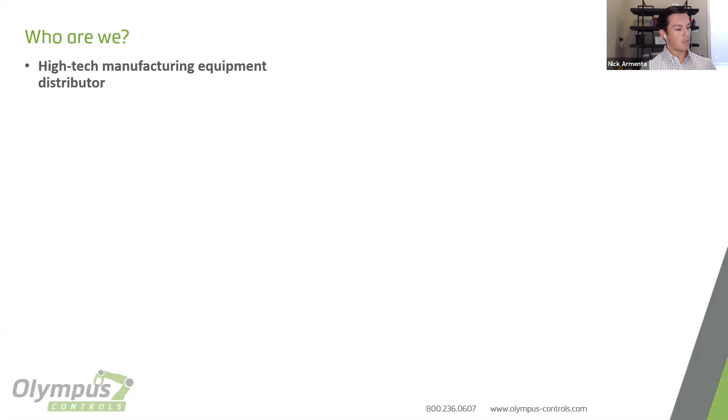Thank you so much, Kent. Thank you, Business Pros, for hosting me on this webinar. As Kent mentioned, I'm local to the area. Some of these are my clients, so I'm very familiar with the DFW locale and the technology in general. So I'm with Olympus Controls. Just a quick intro, who is Olympus Controls? We're a high-tech manufacturing distributor. But what that actually means is that we provide automation solutions, so we're putting all the parts together. We want to be the first ones you call when you have a problem.

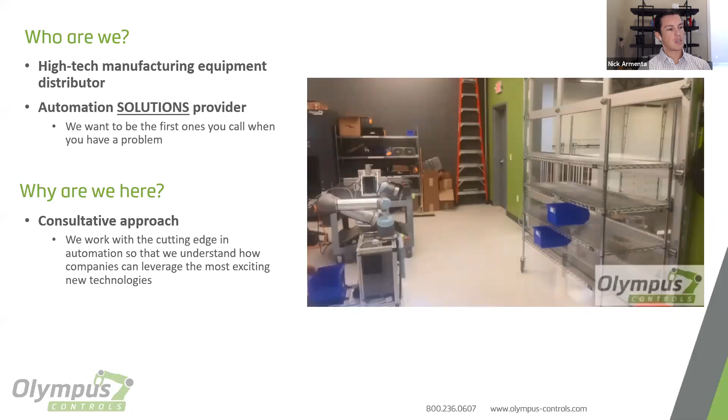Here's a good example of something we've done. You see a robot arm on top of a mobile platform using vision systems, electromechanical grippers, HMIs - pretty much the whole shebang when it comes to automation. So why am I here? We also take a very consultative approach. We work with some of the more cutting edge technologies, which means they're inherently not as well known and not as well understood.

So our goal is to educate everybody so that they understand where these technologies fit and how they can help them excel and achieve what they haven't been able to achieve before in production and manufacturing.

So the topic today that I'm covering is robots. Whether these are called 6 degrees of freedom arms, 6DoF, or 6-axis articulated arms, they all basically mean the same thing. It's a machine that can duplicate anything your human arm does. We can reach any point in space from any location.

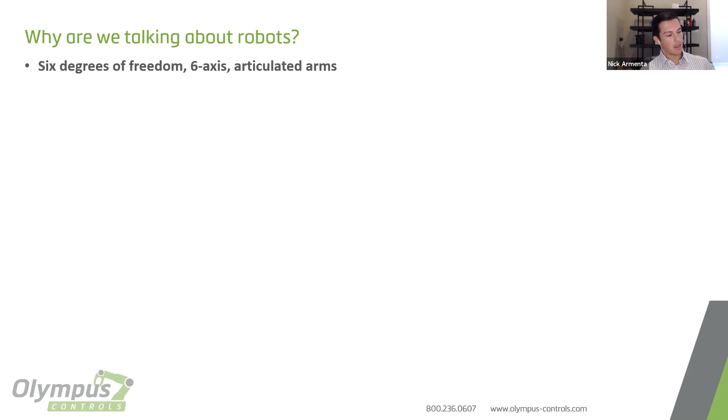So why is that important? That's because of the implications. Eventually, they will be able to do everything you can, but faster, stronger, with more precision, and for pretty much infinite durations. So that's extremely exciting. It's pretty much the closest we've got to an everything machine since we've started.

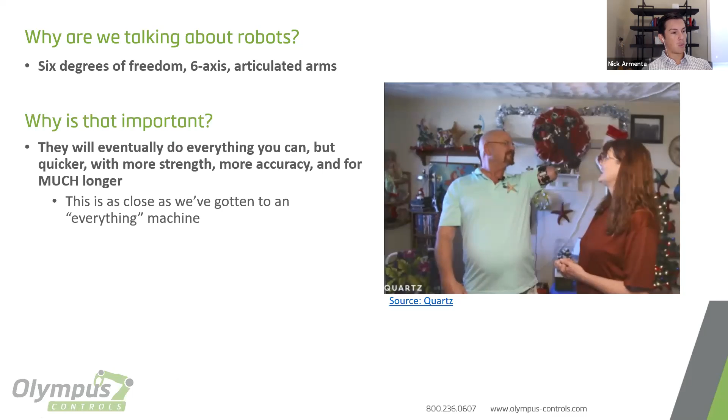So you'll see here, it's more of a humanoid type of arm, but at the same time it has all of the mechanisms we'll be talking about today. It's really as close as we've gotten to being able to do everything with one type of device. But of course that wasn't always the case. These robots have evolved from very simple mechanisms, as you see here, to the more advanced, which I'll show you right now. So let's go with a brief history.

So the first agreed upon robotic arm was the Unimate, developed for GM for welding. This was for spot welding. It did the same thing at the same spot over and over and over.

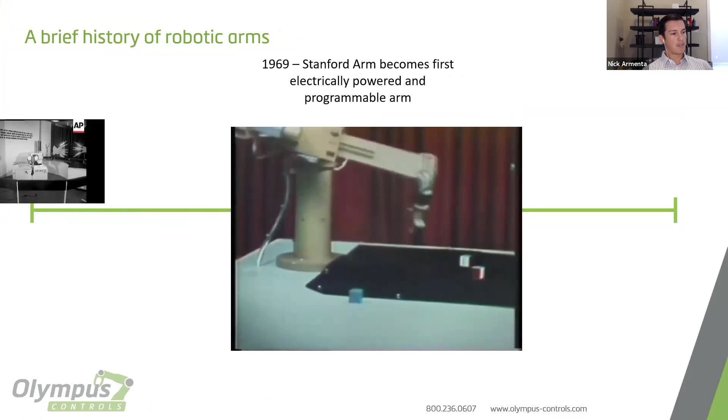From here, we got to the Stanford arm, which is the first electrically powered and programmable arm. So from here, we've advanced to something that can be changed and is controlled completely with electricity, which gives a lot more capabilities. Then the next step is 1963, the first 6 degrees of freedom.

So this is what I mentioned earlier, something that can manipulate things the same way your human arm would. We move on to the Silver Arm in 1974.

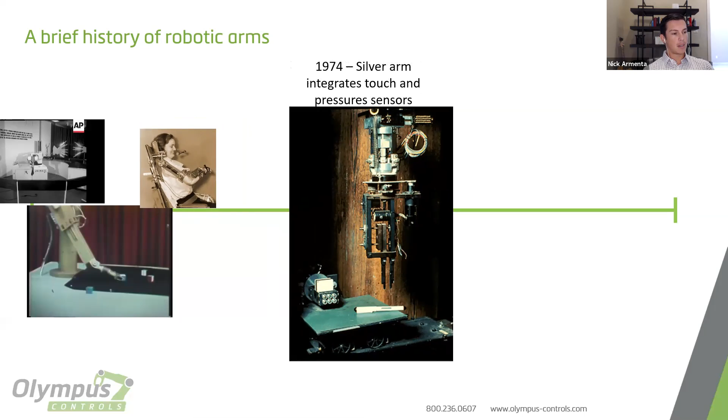This was a device that integrated pressure and touch sensors. So instead of being hard programmed, it is now able to sense its environment to make decisions on the fly and be more accurate and more flexible.

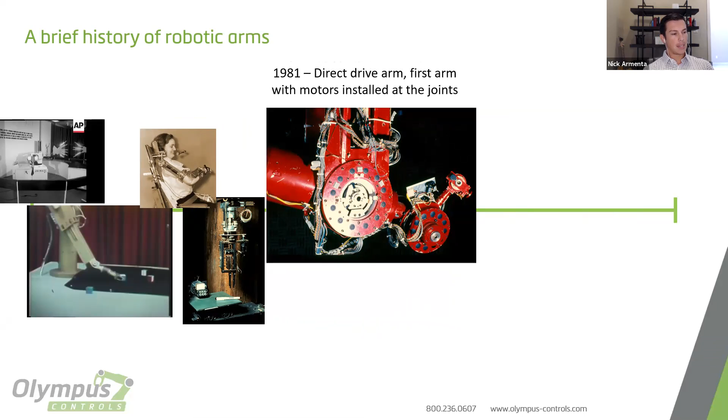In 1981, we started putting the motors at the joints of the arms so that each joint could be controlled independently, not an overall cam type system. What this allowed was for even more complex motion and even lighter weight, stronger arms.

In this next video, you'll see we sent robots to space in 1997. So now we're putting robots in very harsh environments with very complex applications.

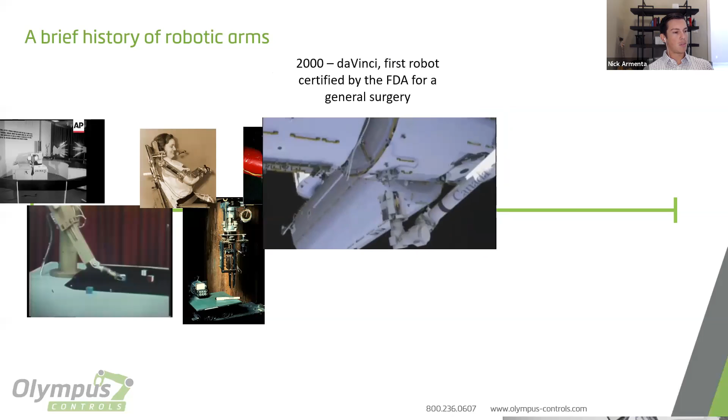Next, we have the Da Vinci. This is very exciting because this is the first robot that was actually able to be approved by the government for working not only around, but inside of people. That's a pretty big step for us trusting robotics, so a pretty exciting step as well.

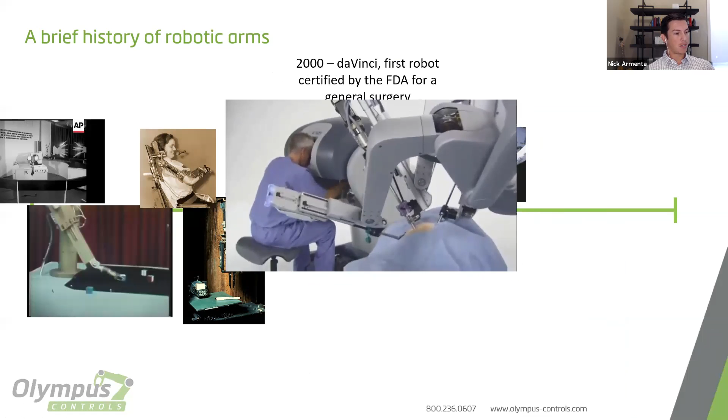Next, in 2007, Universal Robots created the first robot capable of working alongside humans. So now you can safely install robots. You can see me in this video controlling it by hand, something you really weren't able to do before the mid-2000s.

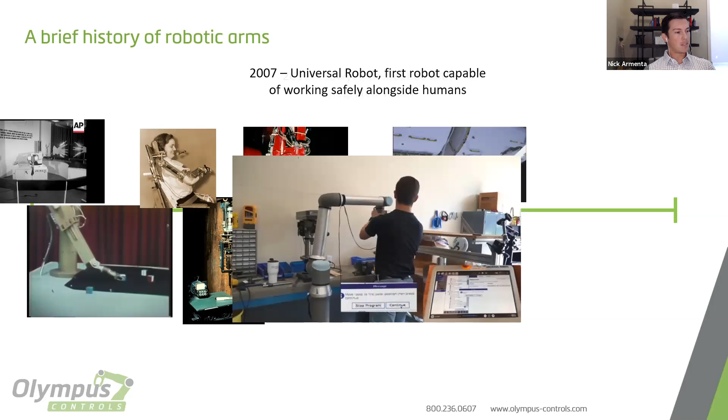In 2012, a company called Rethink Robotics created the Baxter robot, where they integrated cameras into the end of every robot. So not only can it touch, but it can also see everything it's doing, which is a critically important step if you need to make on-the-fly decisions.

And then in 2018, Universal Robots started integrating those touch sensors into every single one of the robots. So every robot that goes out has a sense of touch from the E-series. It can understand if it's encountering forces or if it's being impeded by objects for even more safety.

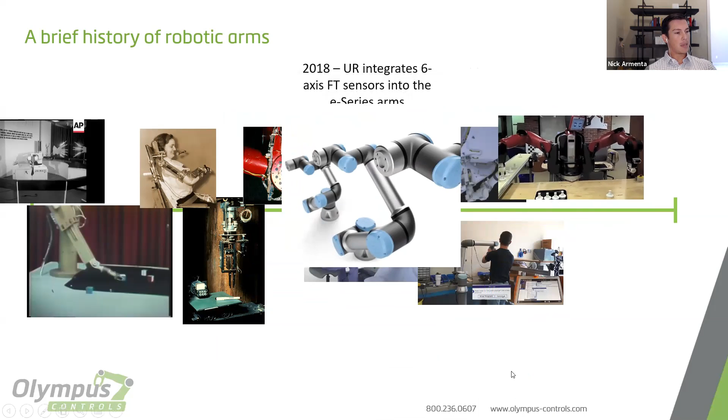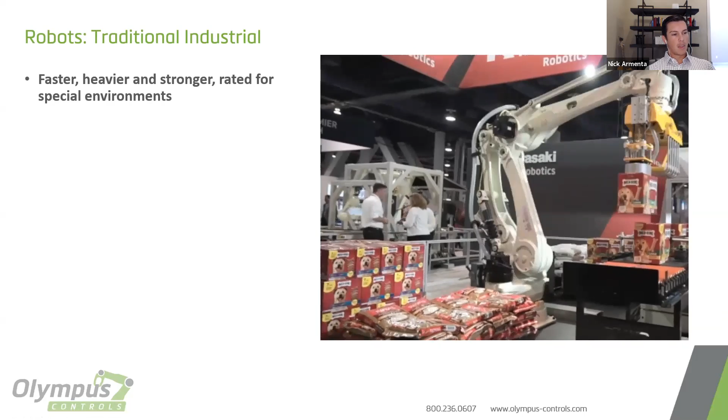So the two different flavors of robots we have typically today, we separate into traditional industrial and collaborative. Traditional industrial is what you'll see here on the right. These are large arms, almost like a T-Rex or dinosaur. They're going to be very fast, very heavy, very efficient, very strong, very accurate, and made for very specialized environments like welding.

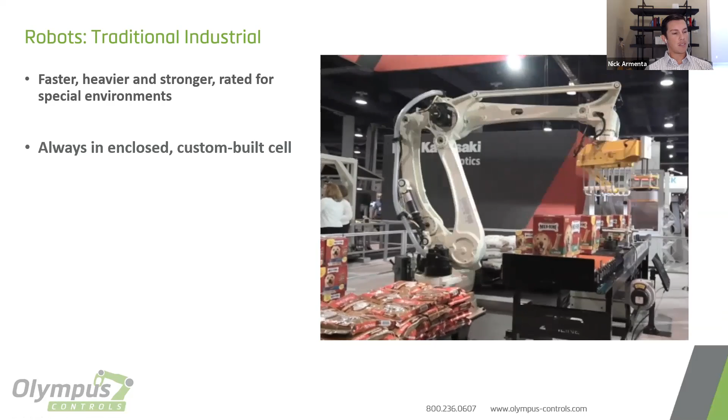What that also means, though, is that you have to put them in these enclosures or custom-built cells. You'll see the fence in the back there. There's quite a bit of space involved when you're deploying these robots. So it's not something anyone can just do on their manufacturing floor. They also come with a very steep learning curve, so anyone that programmed a robot about 20 years ago can probably still program them today when it comes to these types of robots.

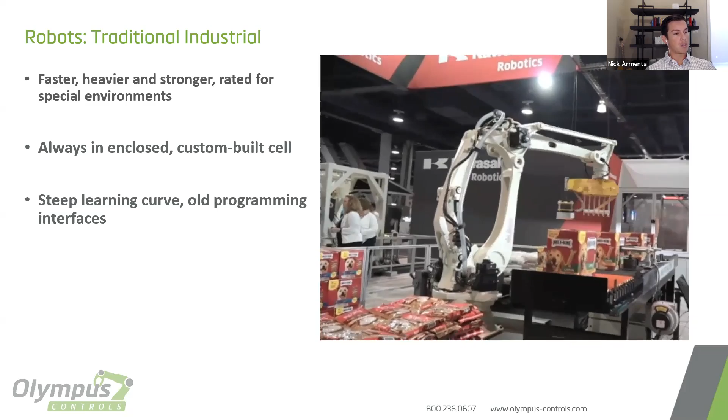The programming styles are tried and true, but they're not necessarily intuitive for the new users of today. They're primarily used in automotive, very high volume or high production lines, whether it's palletizing, picking, machine tending, welding, or adhesives—all the different types are where you'll find these robots.

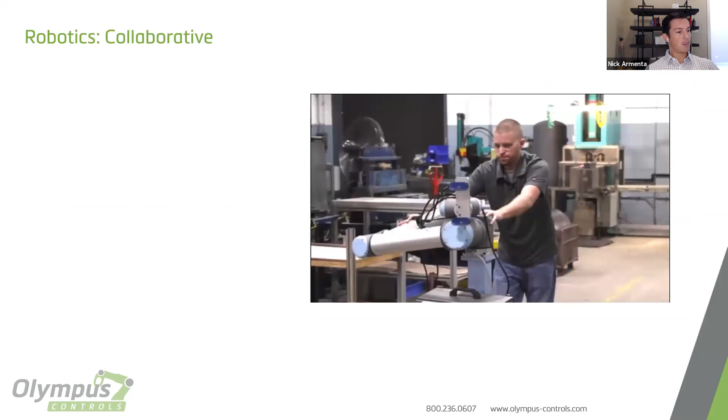The next flavor is a collaborative robot. These are a little bit different because they are able to be deployed alongside people. You'll see they have lower payload capacities, so we're only dealing with less than 30 pounds typically, but we also have slower speeds and a shorter reach. So those all sound like bad things.

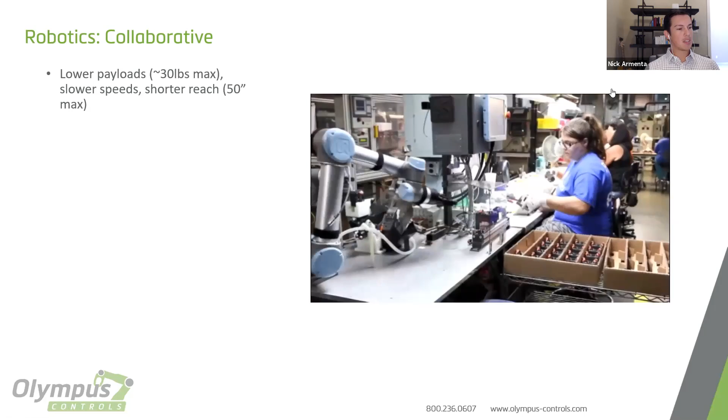And I thought the same thing when I first found this technology. But in reality, they're actually able to be a lot more flexible. That same slowness allows them to work alongside people. The ability to move them around makes them very easy to redeploy. In this video, you'll see them wheeling around the facility, and I know for a fact that Gary moves his robots around as well. So excited to talk about that.

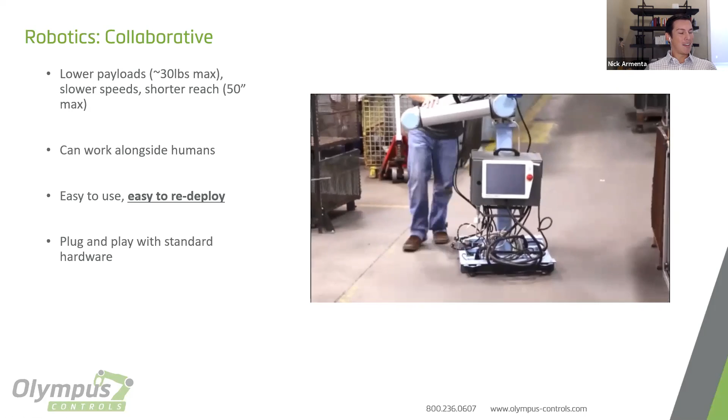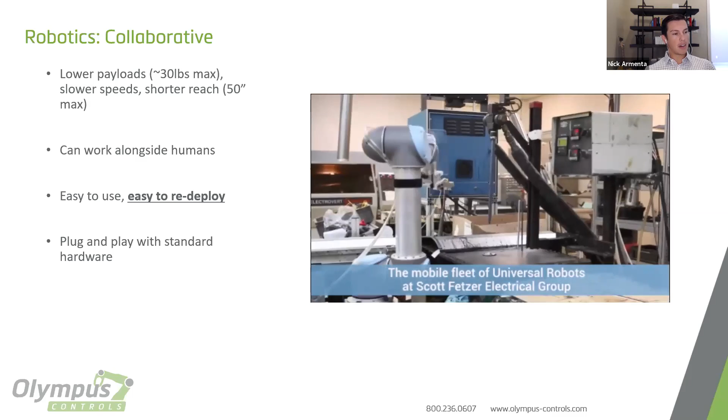Then they're very plug and play with standardized hardware options. So now instead of having to look for a dispensing solution, a gripping solution, welding, palletizing, they have off-the-shelf products that you can be very confident will integrate seamlessly with your production. So you don't have to reinvent the wheel each time.

But for all robots, the same is true. These robots are at their core a tool for enabling you to have more competitive advantages in your production. They're going to allow you to have a better use of human capital, having people use their minds, the most valuable asset, instead of their hands. Picking up and putting down things is not a very mentally strenuous effort.

They'll allow for higher throughput, so they're capable of 24/7 operation, which means they can work all the time without any kind of person monitoring them—overnight shifts, 3 shifts, 2 shifts. They have higher quality, so once they're programmed, they do this exact same job each time, so you can lock in the amount of quality that they offer. And they also have a more consistent process, which goes back to quality because they make the same type of parts, but also essentially puts your production line on a clock.

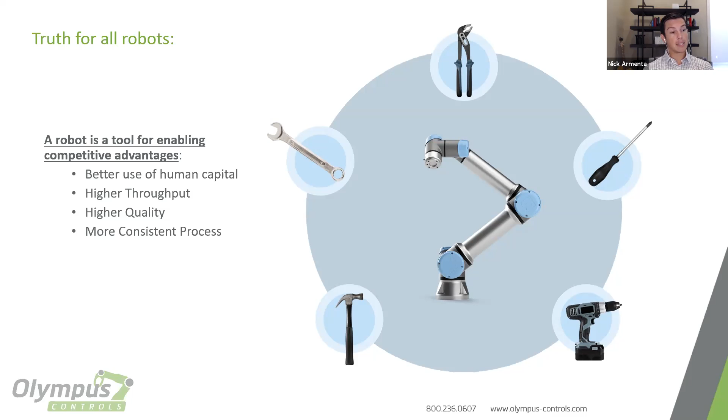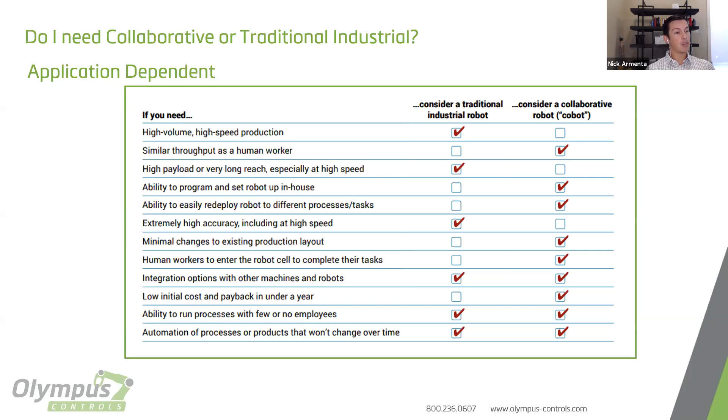The robots have the exact same cycle rate, so that you can expect the parts are going to come out to basically the millisecond every time the robot runs, which really helps you track your production. And then here's a quick list—we'll show this afterward. There's quite a bit to touch on here, but the core basically says: if you have high volume, low mix with a high throughput needed, you need an industrial robot. If you need something you can quickly redeploy and something you can program easily and own yourself, you'd want to look at a collaborative robot.

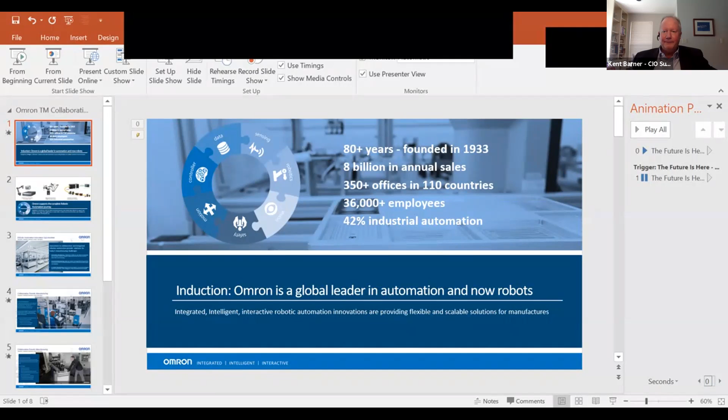So Darrell Paul, Marketing Manager of Omron Industrial Automation. Darrell is an engineer who spent his 20+ years of sales and marketing career specializing in manufacturing automation with advanced motion control and robotics.

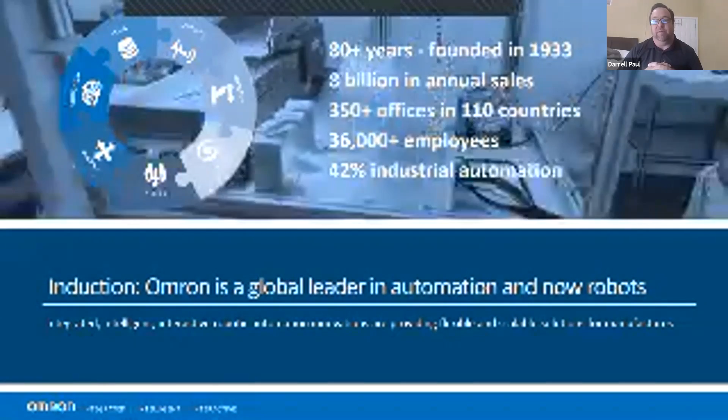So we're going to have an operations center in Dallas. It won't be a production factory, just to clarify. But the services for our customers, proof of concept centers, and how we're supporting our products in the Americas is going to be part of that operation. So we look forward to being part of the Dallas marketplace, and we have proof of concept centers in all the corners of North America.

Especially when it comes to our robot business, because this is a business where you really need to get involved with the customer's operations and truly understand how you're going to accomplish your application. So I am going to talk fast and move fast here to keep us on time.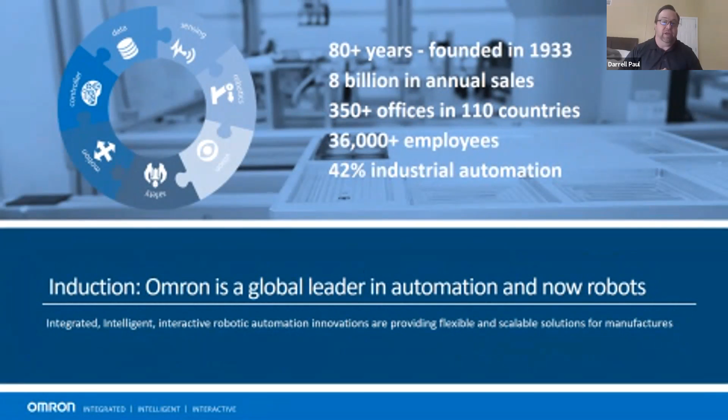But just a quick background on Omron. We have 80 plus years - we were founded in 1933, $8 billion in annual sales. We're located in 110 countries. We're primarily focused on industrial automation, from a global discrete machine control automation standpoint, not getting into process industries. We are the global leader once you aggregate all the business globally.

So pertinent to today's discussion, Omron offers collaborative, articulated, and mobile robots. We also offer high-speed articulated Scara and Delta robots. And regardless of your application, there's always going to be automation that has to go with that robot in order to complete your system.

Omron has an offering of overall machine controls, motion control drives, safety controls, safety devices, vision, HMIs, and data systems. So regardless of where you're starting, whether it's a single collaborative robot doing machine tending, or even a single high-speed robot doing part feeding, wherever you're starting your journey, we're a good company to work with to go from that single project and scale up to where you want to go in your manufacturing process.

And when we're looking at today where robots are, because it has evolved, robots are integrating into every part of the automation industry. So a good way to look at this is it's not just about the fact that it's a robot, but that it's part of the manufacturing process.

The first thing we're looking at today is what's called collaborative manufacturing. This involves robots that are mobile, collaborative, and arm, similar to the ones Nick was talking about, and how they can be directly coupled with your operators to bring a new level of productivity. The next is autonomous manufacturing.

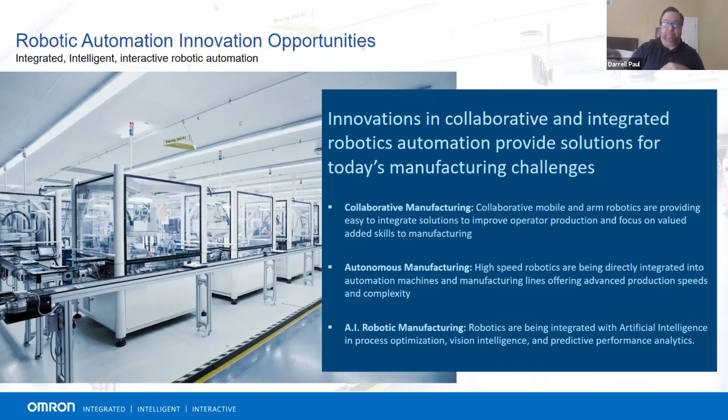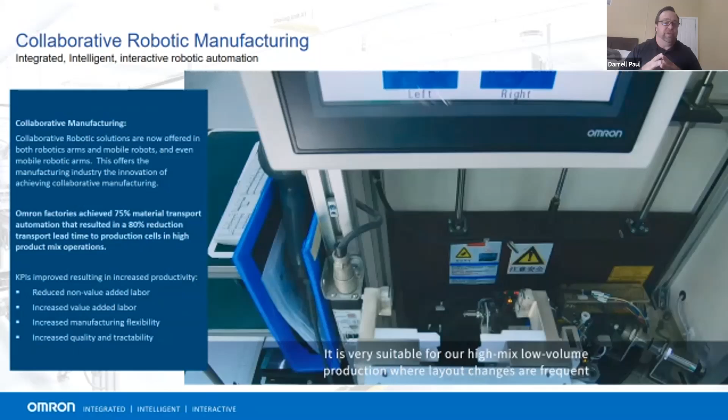So in collaborative manufacturing, one of the first areas Omron sought to deploy the technology, since we started selling this last year, is that we deployed it in our own factory. One of the areas we focused on was material transport, which we were able to automate 75% of, and reduce the lead time of that transport material 80% to the production lines.

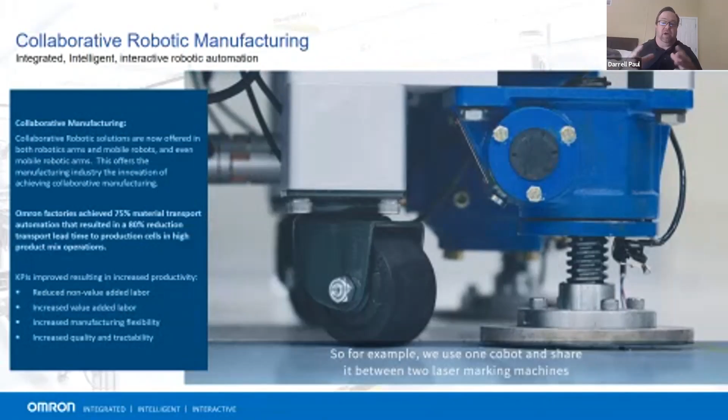And these production lines were all high mix, low volume, very configurable orders. So we basically benefited greatly from putting these collaborative robots into different operations. As you can see, you're seeing a lot of different things being done by these collaborative robots, by the mobile robots. So altogether, it's a very flexible technology that is really changing our manufacturing place today.

Similar to what Nick did on the value propositions, we're reducing the non-value add labor and increasing the value add labor. We're increasing the manufacturing flexibility and adding quality and traceability to the process.

All right, let's go to the next slide here. One of the areas here, and Nick touched on this too, is the return on investment. And really that journey that Nick outlined was a great way to look at it.

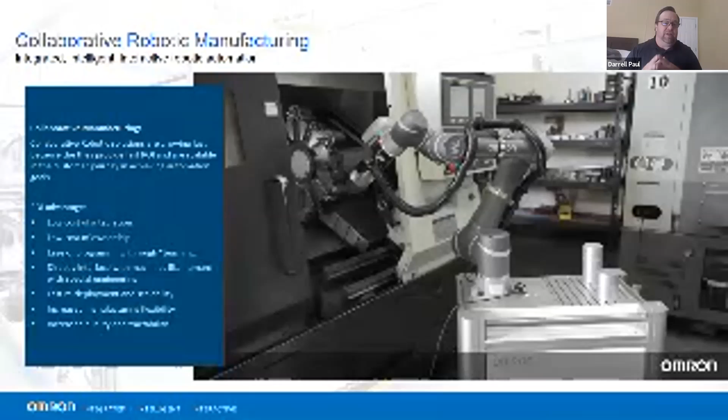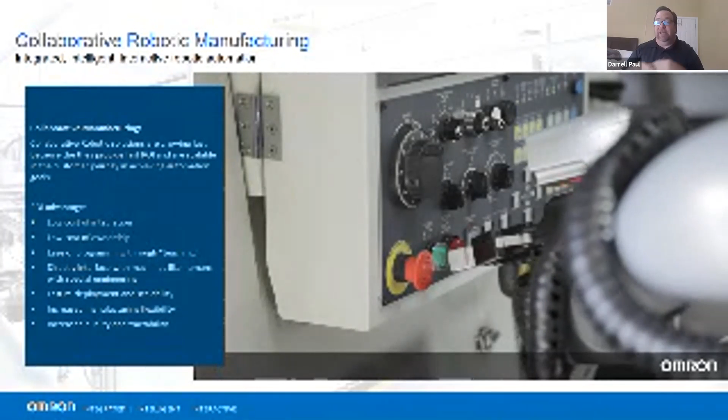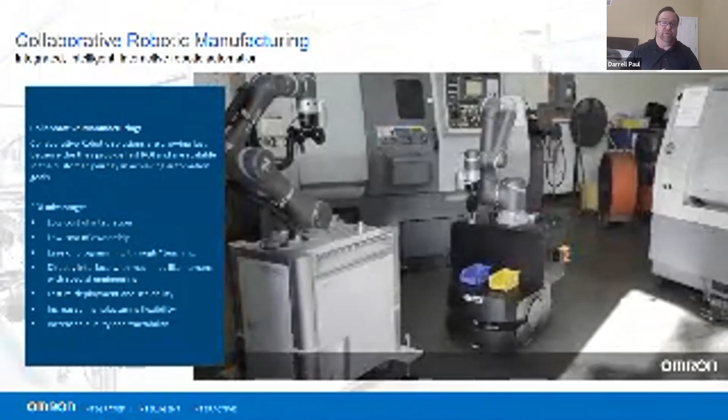And for collaborative robots, there are things that differentiate it from the high-speed robots today, in the fact that there's a lower cost of integration, lower cost of ownership, and ease of programmability - the fact that you can literally teach these robots. And as you can see, these robots can also directly interface with other machines without control interfaces. This reduces a whole lot of cost and a whole lot of speed to implementation. And so these robots really become a true collaborative partner to your operators.

So then we're going to move on to autonomous robotic manufacturing.

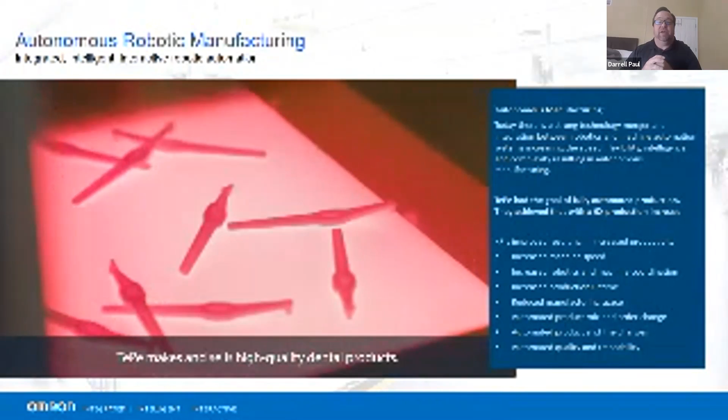Here we're showing you the success story about one of our customers called TePe. They had a goal to fully automate their production and were able to achieve an astounding 10x production increase. Can't promise that's going to be the case every time, but this is what high-speed robots being tightly integrated with automation machines can accomplish.

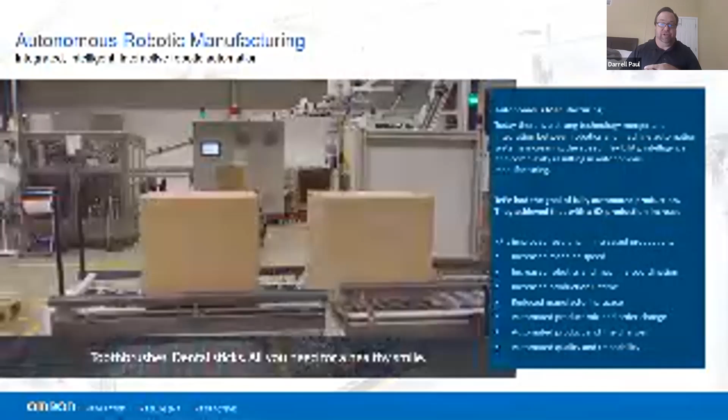What was accomplished here is speed of production, flexibility, and intelligence. They were able to change what they were packing, what they were manufacturing, how they were executing orders, all in real time. The production line and robots were autonomous in making those changes on the fly.

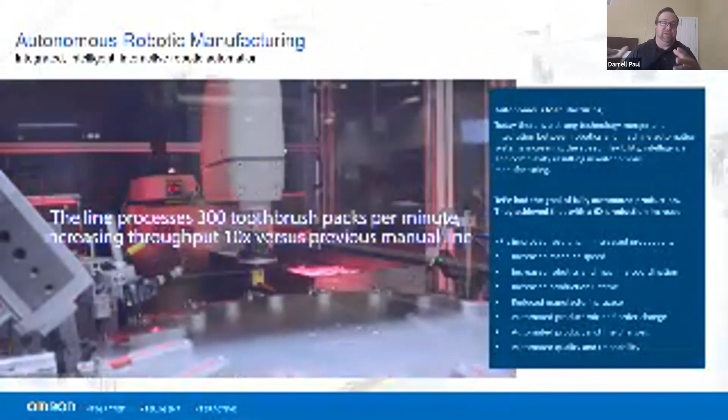All while tracking quality and tracing the products through the process. In this video you're seeing a lot of our high-speed robots, and a couple applications of our mobile robots. This customer was able to pull those technologies together to give it that full autonomous, complete end-to-end automation capability.

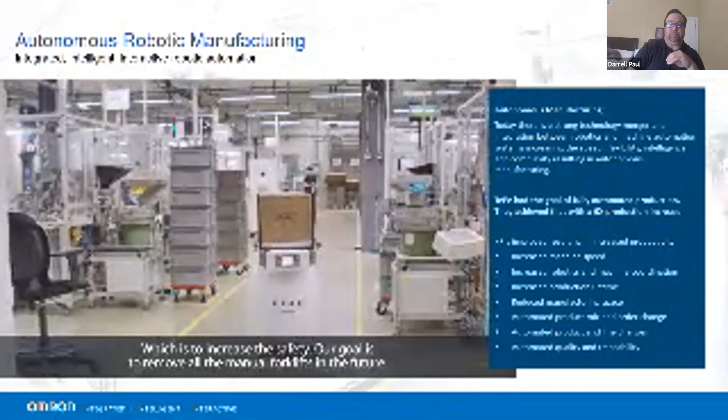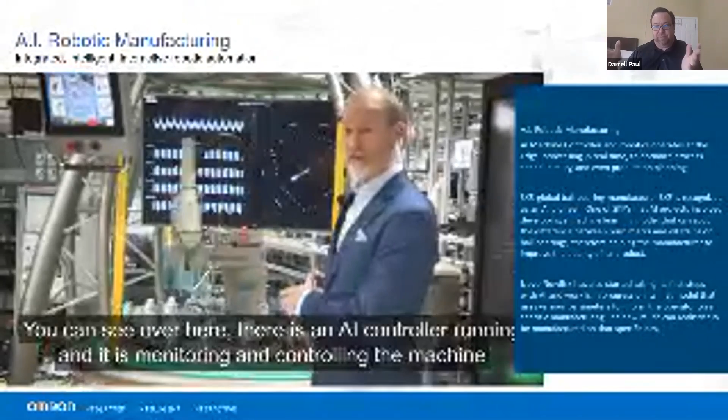The next topic is artificial intelligence and how it's being integrated into robotics. We've done a couple of proof of concepts, and we also have customer success stories to share about how AI is deployed in terms of automation, at the edge level.

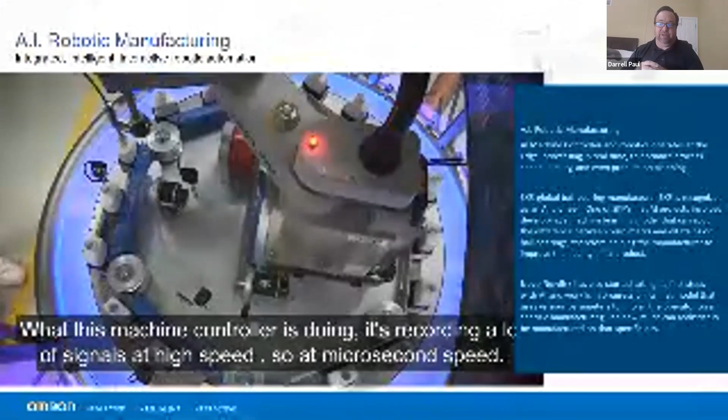There are artificial intelligence systems deployed at what's called the cloud level, up in the servers and IT market. And then there's the edge level, down at the machine floor level. We process artificial intelligence in real time to affect process optimization and real-time adjustments.

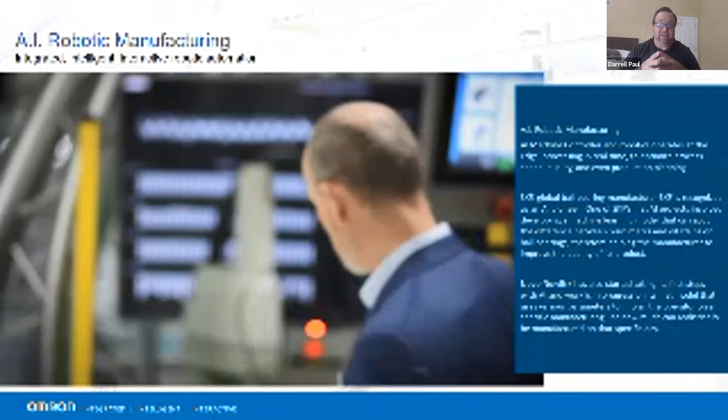SKF was able to use this technology in their ball bearing manufacturing process, where they could detect things that couldn't be detected by automation machines or even by humans, like burn marks and stains, and then understand what changes in the process needed to be optimized to eliminate or correct those quality problems.

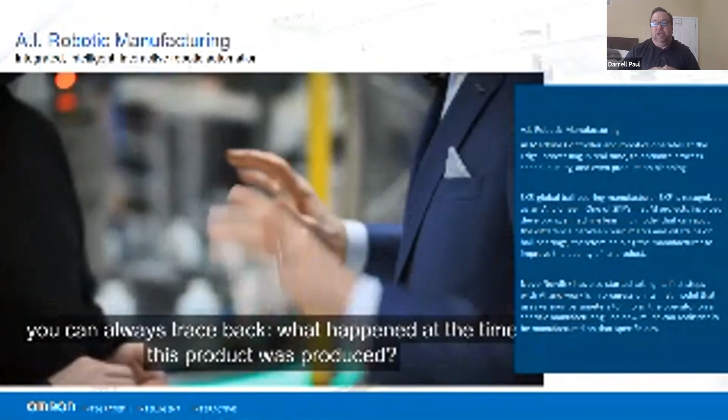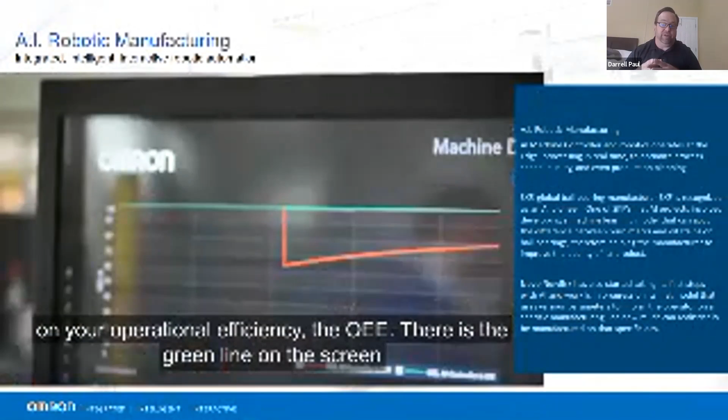At Novo Nordisk, they implemented AI to help optimize their production operations, to understand, given certain demands of manufacturing and different products, what was the realistic manufacturing capability and optimization schedule. So those are two different implementations of how artificial intelligence is being implemented today.

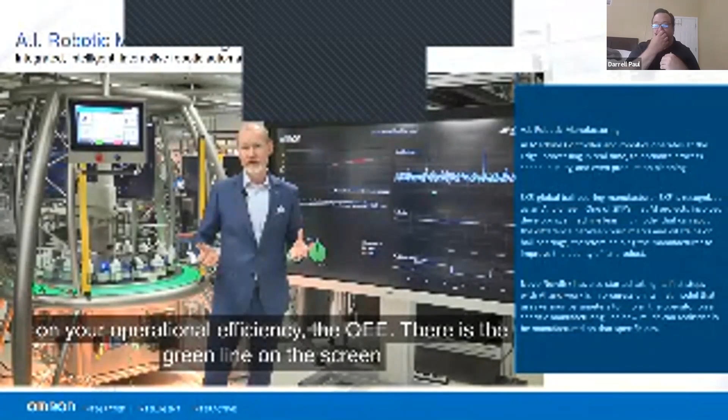The next example is where artificial intelligence is learning from an operator. In this situation, there's a vision camera in several different spots of this machine, watching what the operator is doing, and the robot is learning how to assemble and build certain orders based on watching the operator.

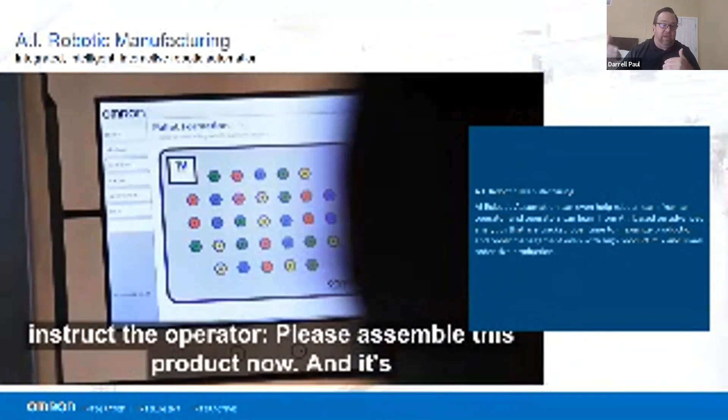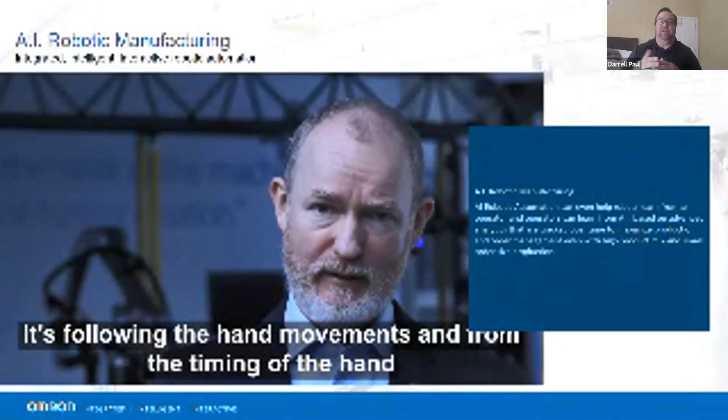As the artificial intelligence system has learned several operations, it can also teach operators what it's learned, showing how things could be optimized by doing it this way or that way. So there's a true exchange of information between the AI system and the human operators to really optimize production.

I know that was quick, and I look forward to talking to you guys in our discussion section, but that's all for me.

On this first slide, I wanted to express that I do not make robots, I am on a journey to integrate and initiate programs where we're going to automation and robotics along with data analytics. So I thought I'd share with you a CEO's perspective that I'm going through on developing a roadmap to get to our future state, and help you think through some of the questions that come up with that.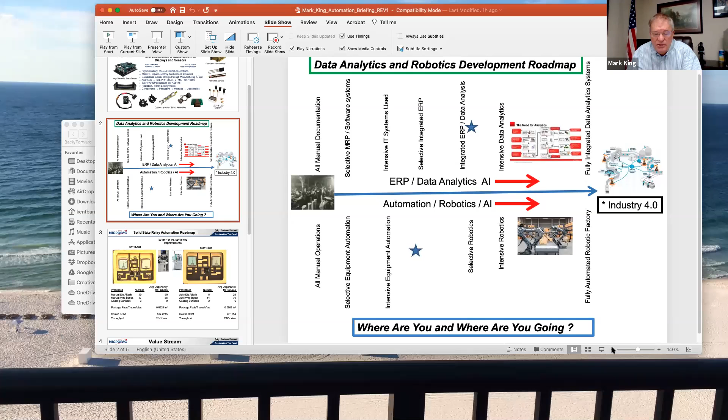To the far left is the very manual, old-fashioned fabrication facility, and to the right is the extreme Industry 4.0, completely lights-out AI factory. What I want you to remember as you go through your journey or enter into that journey is to ask yourself the simple question: where are you today on this roadmap, and then where do you want to be in your future state? Define your future state, say in 3 years, and then you can start to initiate plans to get you along the path of the initiatives that will take you there.

The stars represent pretty much where I am right now. If I go back 5 years, it's much further to the left on the data analytics side. You start, of course, with the ERP, but how you use the ERP and the data and convert that into information is critical. And then how do you use AI? Because AI is here to stay. It's been in development for 30 years, but right now AI is available to us as a tool and technology that was not otherwise available to us several years back.

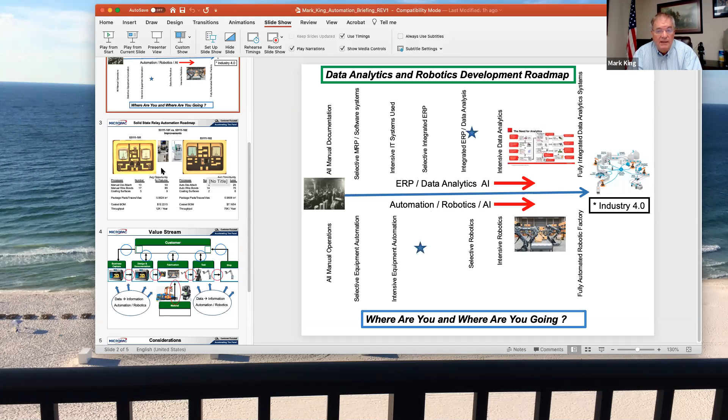Go ahead to the next slide. I just wanted to show an example of what we've done at Micropac. This is a particular product used for the launchers for the Patriot system. The importance here is that it has an opto-isolated connection or controls to turn on and off MOSFETs. This particular part you see is about the size of your thumbnail.

To the left is when we were doing this by hand without any automation. You'll see the numbers of opportunities for failures, the throughput, the cost — we were doing about 12,000 a year, which was our capacity. If you go to the right, you'll see that through automation and process optimization that goes with it, we were able to increase our throughput from 12,000 a year to 75,000 a year, and of course improve our costs.

We improved our costs by redesigning it so that it was suitable for automation. So the robots you see there are what would be referred to as autonomous robots, used to do what we used to do manually. We're really excited about the opportunities we're bringing into play, both with the quality impact, the cost impact, and of course more profits and throughput, which is what we're looking for.

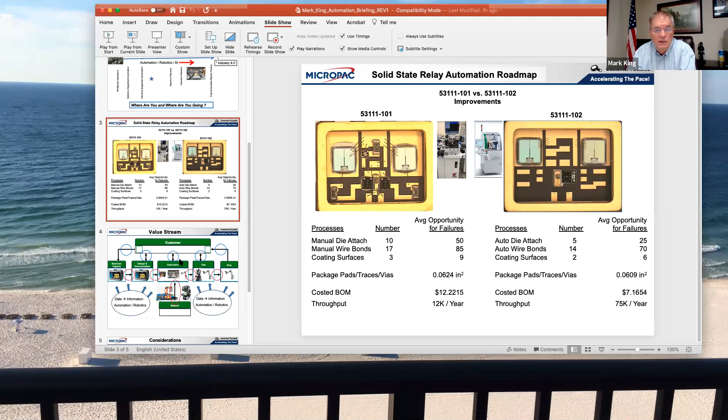Go ahead. So my last slide, and I know we're short on time, so I'm really anxious to answer questions.

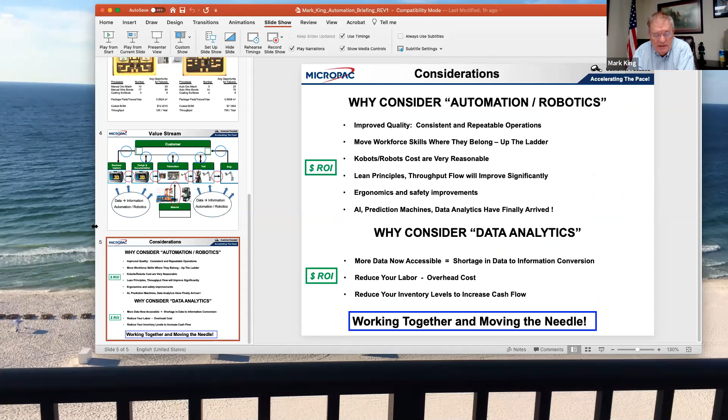You ought to ask yourself why you should consider automation, and in parallel, why you should consider data analytics. On the left, obviously a return on investment exists, particularly as Nick pointed out with the cobots. But also what you get with it, which we sometimes don't consider, is improved quality just because of the consistent repeatability and quality enhancements, as I explained earlier in my example. It moves the workforce up the ladder, and that's really important because it allows you to pay your employees more. They're adding more value to the process, and it helps eliminate the non-value repeatable processes, which from a healthcare standpoint—carpal tunnel and other problems from repeated motion—it really eliminates. I mentioned lean principles already, and ergonomics.

What I'm excited about is that a lot of the data analytics, a lot of the AI we're talking about, has finally arrived. I've been in technology for a long time, and it's nice to see that it's finally arrived—same thing with data analytics that goes with this. The whole mission here is to convert data into information. You need to understand you have the ability to reduce your overhead cost, reduce your inventory, and manage inventory in a much more efficient way, which increases your cash flow when running a business. If we coordinate, work, and collaborate together, we can really move the needle, and that's what I'm excited about. I'm not at the end state—my future state is still in the future, but I have a lot of experience thinking through what it's going to take to move this needle and consider the future state and the roadmap to get there.

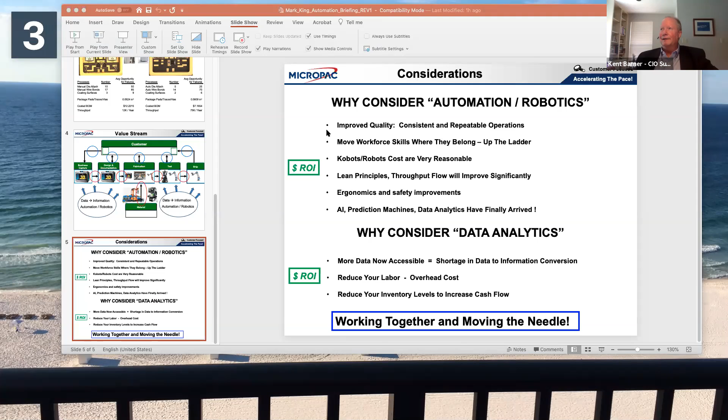Let me see how your slides are going to perform for us today. Is that the slide deck? Can y'all see that? No? Yes, no, anybody? No? Okay, it's your desktop right now. Okay, well it goes into presenter mode and I lose it, so we're going to have to just do the same thing in the interest of time. How about that? Okay, see, yep, yeah we can see that. Okay, you might want to make it full screen. And I'm not sure the automation is going to work either. This one doesn't have any. Oh okay, good. All right, sorry guys.

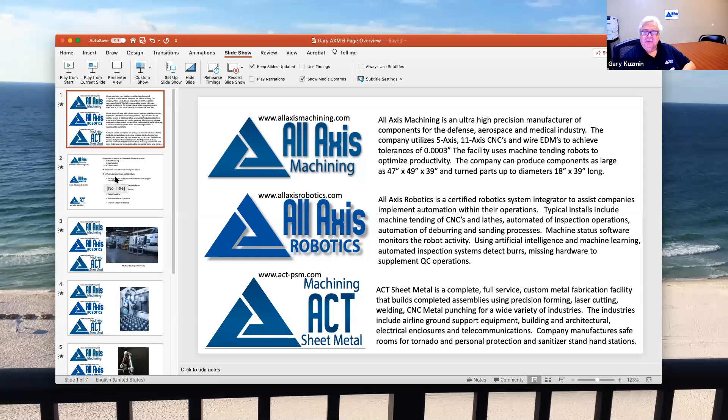It turned out that our engineers were so good at this particular process that we created All Axis Robotics, which was designed to help other machine shops and manufacturing operations with the automation and implementation of automation within their own factories. We took the knowledge we learned from doing our own integrations and the problems associated with low volume, high mix operations, and we passed that along by helping other companies take advantage of the newest technology out there, which is really these collaborative robots, talked about by Nick and several other presenters.

The very first thing I want to talk about, and I think everybody else has too, is that automation is, at the end of the day, from my perspective as a CEO, a journey. It doesn't stop. You build upon what you learned the last 6 months and the 6 months before that.

Just to give you a perspective, we started off with machine tending as the very basic thing we wanted to achieve. Why did we want to do machine tending? Because that's where we saw the greatest value in the operations. Where we only had a 1-shift operation, we then moved to a 2nd shift operation, and then finally a 3rd, with very few people, but we gained 66% more manufacturing time just by adding robots onto the machines.

Interestingly enough, today with this whole COVID thing, we were actually ahead of the game even before this became a problem. As COVID became a bigger problem, we were well situated to take advantage of the automation we already put in. For instance, today the way we look is on first shift, where we have the bulk of our employees, they are the ones doing the automation and development of the programming of the robots, setting the machines up, qualifying the machines.

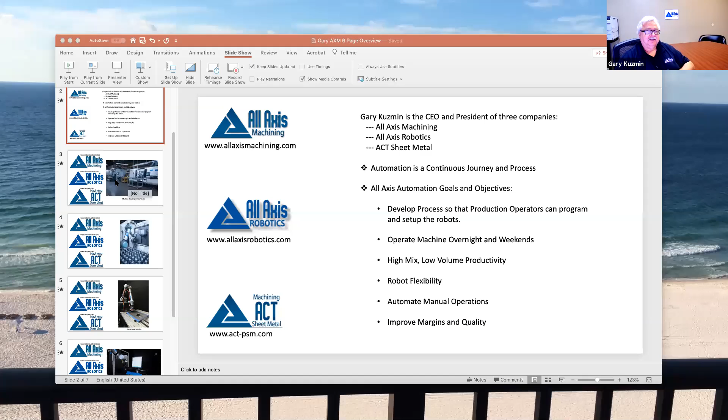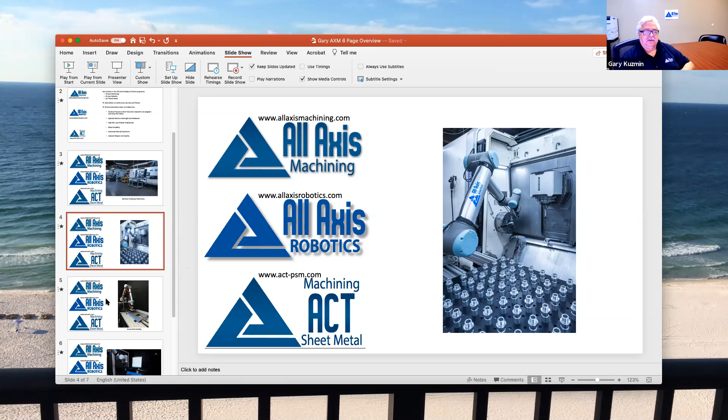This is another health and safety benefit of the robots, as Mark mentioned, where the operators are not exposed to any dust that's around there, and our operators don't have any muscle fatigue at that point.

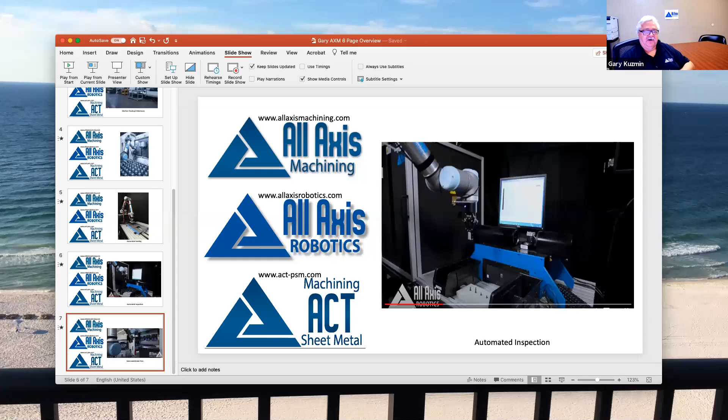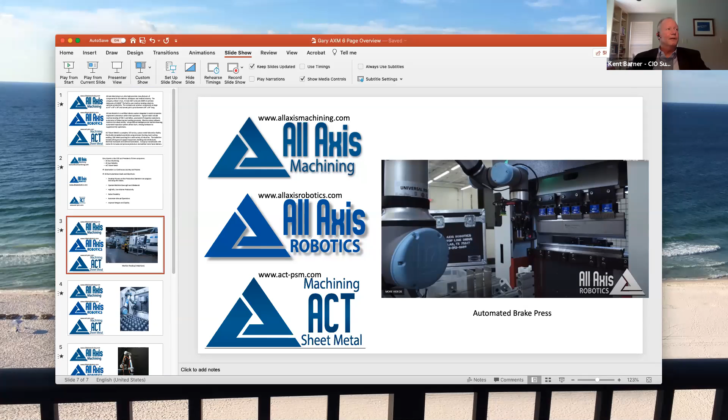But one of the things, and Mark, you weigh in on this as well. We're looking at Gary's place. But you know, there is the robot, right? And you go buy that robot, and you could tell me, 30,000, 50,000, somewhere in that neighborhood. But then what else did you have to do here, Gary, to make this work?

So yeah, there's a lot of things that you have to make it work, and I'll try to point them out. You've got to build a parts presentation tray because parts have to be loaded into the machine tending environment. But to do that, that robot has to be in a fixed point in space that cannot deviate, otherwise it will not be able to load the parts in properly.

So we came up with another set of parts that are in for patents right now that, without drilling holes into the floor, can actually lock that whole presentation tray right in front of the machine. So whether it gets bumped or not, it doesn't move, which is something you have to worry about in a factory environment. You also have to come up with grippers that are on there.

We also have 3D printers that make special fingers that go into there. So there's probably at least another $20,000 to $30,000 worth of effort that has to be put in to make these things what I call robust for the operations. Mark, I don't know if you want to add anything else to that.

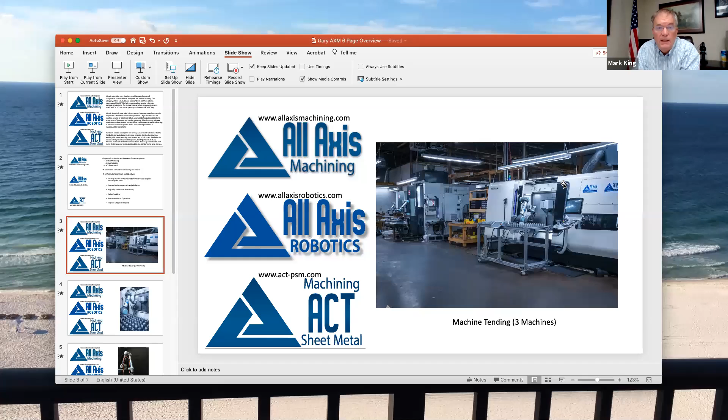Just to add on what Gary was saying, he's exactly right. In this application he's touching on what we refer to as a pick and place. A common mistake I see is not really refining your process and having a straightforward flow: parts come in on a tray, parts go into the machine, parts come out of the machine.

That's a fairly simple process you can nail down quickly so you can automate it effectively. Starting simple with something like this is really the key, because like Gary mentioned, I don't think he realized all those pieces were part of it initially. The more you learn their simplicity, the more effective you become. It's a marathon, not a sprint. Gary nailed it. All those pieces there, robots and automation in general expect consistency. If it does not see consistency, it does not produce consistency.

One of the questions I got, I don't know if the rest of you got it, but it's a very valid question: are we talking about using robots to replace people and replace jobs, and what happens to the job market as a result? Some people get sensitive about that. And the real truth is, at least in my company, Micropac, I have a lot of people I might pay at a lower pay scale to do a lot of repeated jobs.

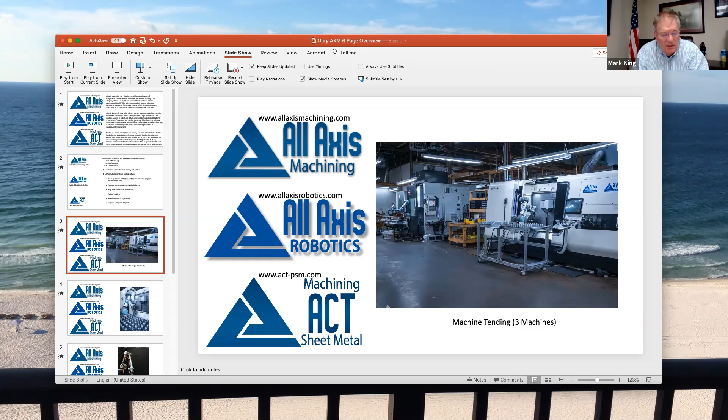When I can replace that, I can elevate their pay and elevate their skill levels, not just in the electronics, programming, and software side of it, but also in the work that needs to be done. They're adding more value to the process flow as I build product, and that means I'm able to pay them more. So instead of the old days of paying somebody say $11 to $12 an hour to do entry-level repeatable work, I can pay them $15 to $16 an hour, and they're worth it because they're adding value, 8 hours a day, to the process and the flow.

So it's very important to me, in terms of the people side of this, that we implement it in a way that's good for all of the employees. And by the way, the employees get really excited about what they can do with automation and robotics. At least that's been my experience.

Let me add a little bit to Mark's point. When we first brought robots into our company, I think people were a little tenuous about what's going to happen to their job, and that's always a natural consequence. But as they realized it, some of our employees realized it was to their health benefit. They didn't have to sit there and do rigorous manual labor that could be transferred over to a robot, and I think some of our employees appreciated that.